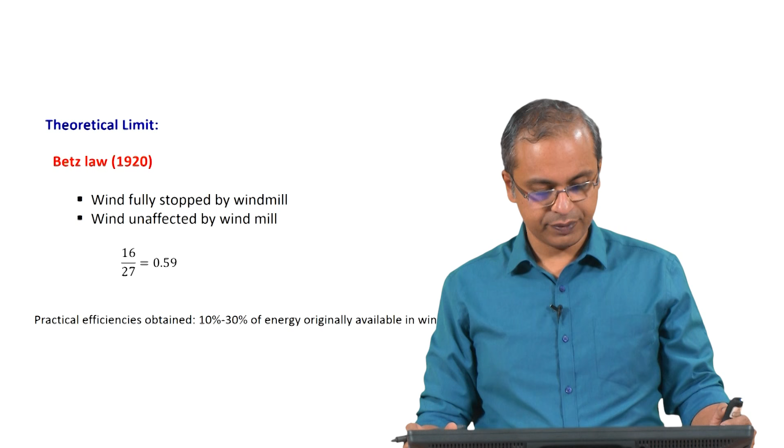We will go through this derivation, which brings together the way we derived how much energy is there in the wind. If you go through this derivation, you have a better sense of all the parameters people need to consider when looking at this kind of energy process. Okay, so this is what we will try to do. This, as I mentioned, is a theoretical limit on what you can extract from blowing breeze or blowing wind.

Of course, there are some limits to this limit, because like with anything else there are some assumptions on which it is derived, and you can always think of some way to violate or work around those assumptions, so this limit may not be the absolute upper end. But it is still considered a very important law, because a very large fraction of the windmills out there are designed such that they inherently fall within the ambit of this law.

So they do not have any new design features which are in violation of this law, so to speak, but largely they are consistent with this law. So we also mentioned that you can consider two extremes. You have a windmill and you have wind blowing towards the windmill. So you have two extreme possibilities.

One is that the wind is completely stopped by the windmill, and therefore it would appear inherently that all the energy in the wind got transferred to the windmill, and therefore got captured as energy that you could use somewhere. So that seems like the best possible way in which you would want to do it, because 100% of the energy is captured.

But in a practical situation, that is not what happens, because when you say the wind is 100% stopped, it is not disappearing anywhere, it is stopped there. It has just basically come and stopped in front of the windmill. It has not gone past the windmill. So subsequent wind that is coming there is not in a position to reach the windmill, because the wind that came there first is parked there. All those molecules that arrived there are parked right there in front of the windmill, they have not gone anywhere.

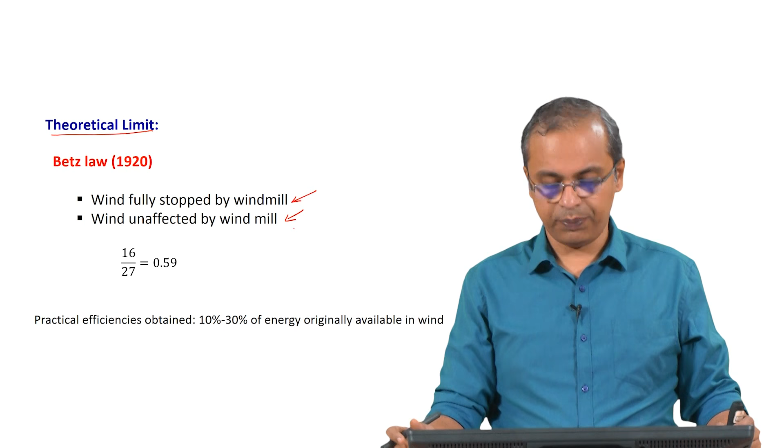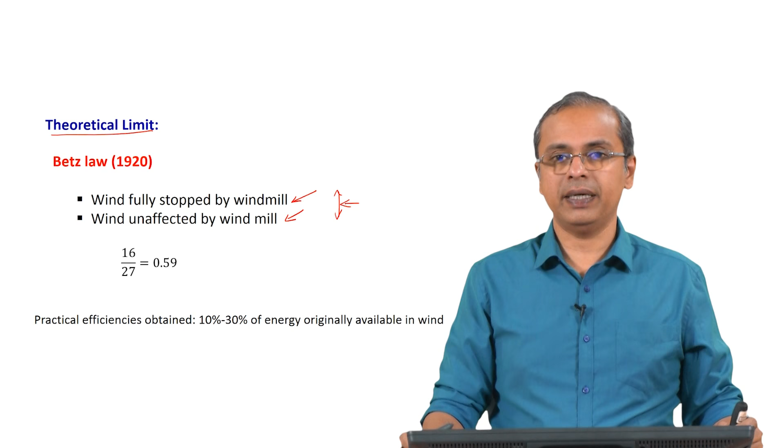So these two represent two extremes of how the wind might interact with the windmill, and in both cases the energy captured is 0. So naturally you can visualize that there will be a range of possibilities in between these two, where the amount of energy transferred from the wind to the windmill is steadily increasing and reaches some kind of a maximum and then goes back down to the other extreme. So these are the two extremes. Somewhere in between, not exactly in the middle, you can expect some maximum being attained during this transfer process. So we would like to get a sense of what that is.

It is also seen through this law that the limit seems to be roughly 59.3%. So that number we will see if we can arrive at: 0.593. That seems to be the limit that you can extract from the wind, which is not bad. If you are extracting 60% of the energy that is anyway coming to you free, that seems to be a pretty good thing to do.

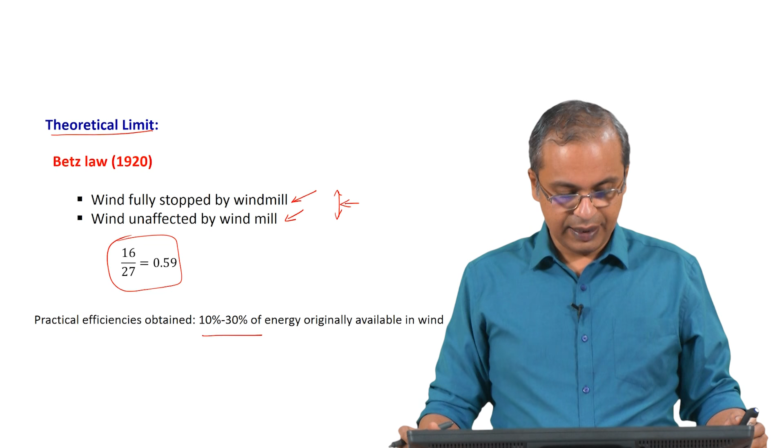Practical efficiencies are already in the 10 to 30% of the energy that is available in the wind. So if you take into account any other inefficiencies in the process, you are still getting about 30%, which again is excellent because you are doing nothing. The wind is anyway blowing, you just put a windmill and it keeps generating that as electricity for you. Right. So this is the framework of the Betz law, and this is what we will try to derive in our class today.

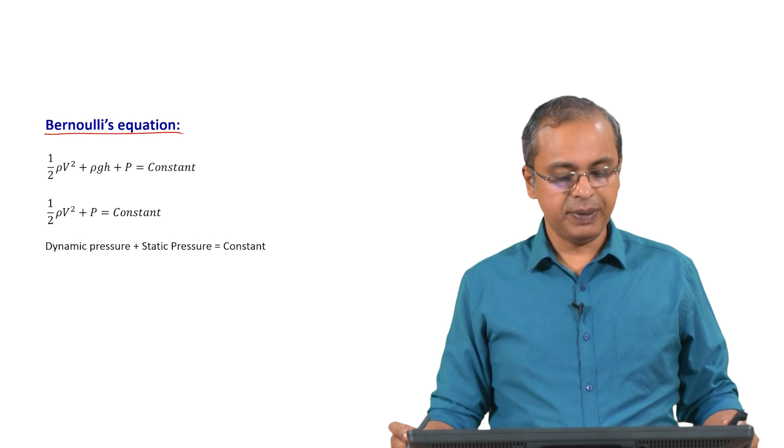So, to derive the Betz law, we need to start off with an equation which many of you may have heard of and may have differing levels of familiarity with. It is basically the Bernoulli's equation. So, based on your background, if you are in mechanical engineering, maybe you have spent more time reading about this equation.

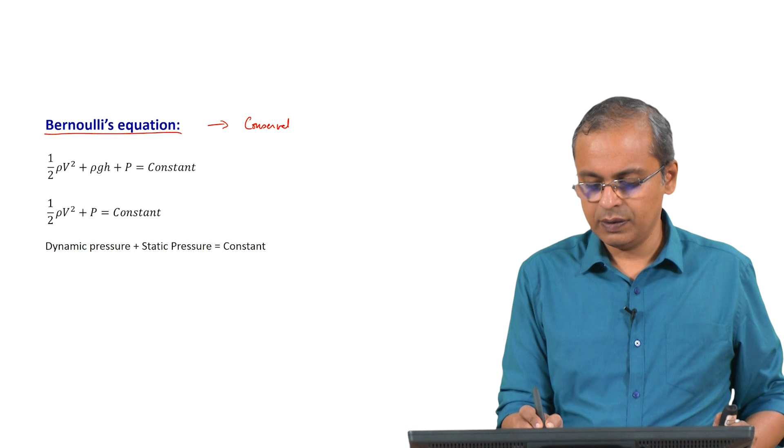Basically it is simply an equation that represents conservation of energy, but the scheme of parameters within which we are looking at this conservation of energy is in the flow of fluids. So, we always have kinetic energy, potential energies. We have various forms of energy.

We say energy is conserved, which means you start off with a system that has some total energy which consists of potential energy, kinetic energy, any other form of energy that might be there in the system. With passage of time, one form of energy will get converted to another form based on the circumstances. Maybe potential energy goes up, maybe kinetic energy comes down. At the end of the day, the total energy will still remain the same. We have not lost energy anywhere.

That is if you take the system as complete, with all entities involved in that system. We are more familiar with it in the form of day to day objects. We would typically have encountered problems where, let us say, a ball is traveling with some velocity and then it reaches some height. Based on the initial velocity you can decide what height it has reached, because whatever kinetic energy was there gets converted to potential energy. Many such problems we are likely to have become familiar with.

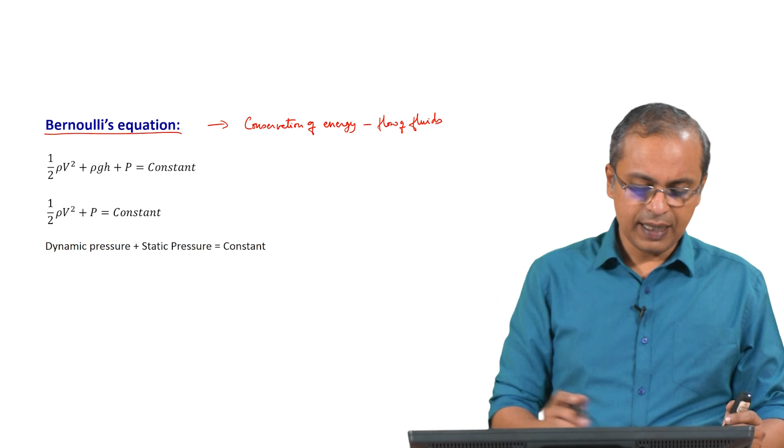The same concept is now used in the case of fluids. So, broadly there are three parameters to look at: something associated with the kinetic energy of the fluid, something associated with the potential energy of the fluid, and something associated with pressure of the fluid, and the sum of these three is a constant.

There are some assumptions here, so we will at least briefly consider those, but before we even do that, we have a quantity here, pressure, and on this side something that looks like energy. We say half mv square and we associate this with kinetic energy, and you have something like half rho v square here. Here you have pressure. So, how come we have pressure and kinetic energy in the same equation? It looks like there is something wrong with the equation, but actually it is not.

If you actually look at what is here, you do not have m, you have rho. So, we do not have half mv square in the equation, we have half rho v square. So, now let us look at the dimensions of half rho v square. Interestingly, you will find a value which will show you why it can be on the same side as pressure.

So, what is rho? Rho is simply mass per unit volume. So, it is the same as half mv square divided by volume. Density is mass per unit volume, that is all I have put here. Half mv square is kinetic energy, so that is in joules, and volume is in meter cube.

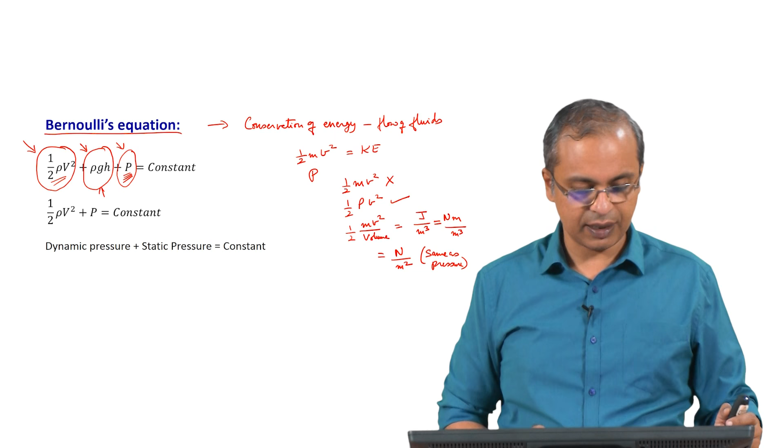So, this factor does not change from time to time. What we write on the left hand side will be the same thing that we will write on the right hand side. So, we can neglect it, we will just cancel it out and it is irrelevant to us. Rho g h by itself will be a constant in our case because h will remain a constant. So, the second term is irrelevant. So, really the equation that we are working with is this one, half rho v square plus P is a constant.

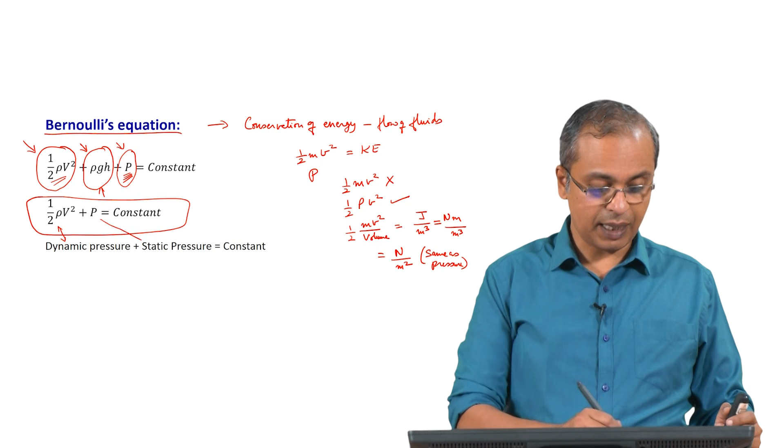And in fact, the way they describe it in the context of fluid flow is that the first term there is the dynamic pressure and the second term here is referred to as the static pressure. So, pressure in the context that we typically associate pressure with is the P that you see here, but we are also saying that when the fluid is flowing, you can think of another pressure, the dynamic pressure, which builds because of the fact that the fluid is flowing. So, this is a constant. So, when the velocity of the fluid picks up, since the sum is a constant, the static pressure is coming down and the dynamic pressure is going up, is the way in which we interpret this equation.

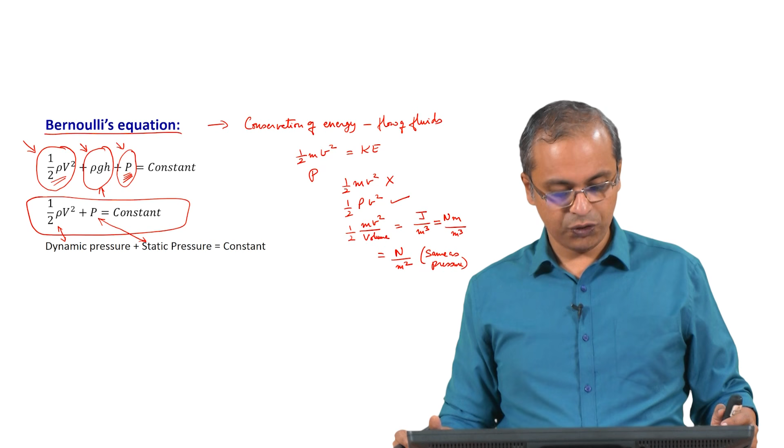Okay. So, this is what we will keep in mind as we go forward and try to derive the Betz equation. So, as I said, the way we will do it is we will consider that there is some windmill standing here. So, I will just draw it; we will assume that this represents a windmill that is facing the breeze, and then there is some region.

So, there is wind that is blowing this way and it goes past the windmill, interacts with the windmill and then goes away. So, coming in, the wind is coming in with a velocity v1, and we will say that this is far enough away from the windmill that the static pressure there is unaffected by the presence of the windmill. So, we will call that P infinity, far away from the windmill.

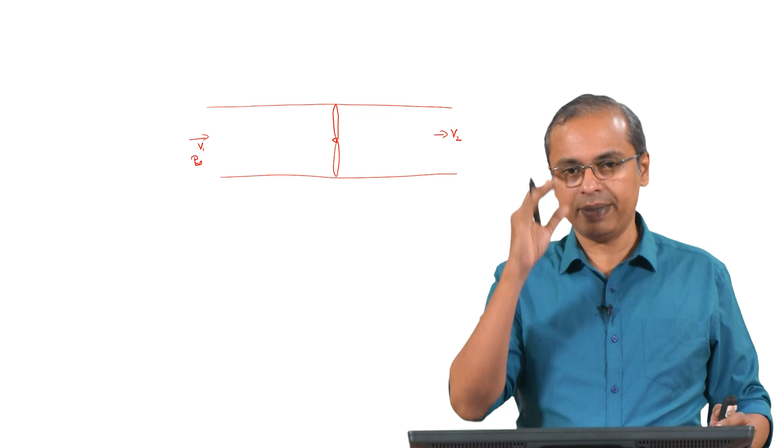And then when we come out on this side, again let us go far away from the windmill. Let us say now the velocity has stabilized at a value v2. So, it is past the windmill, some interaction happened, and after that something else might have happened to the wind; it eventually stabilized at a value v2, and again it is far enough away from the windmill that the pressure is back at P infinity. So, this is what we are assuming has happened to the breeze as it has come from one side of the windmill to the other.

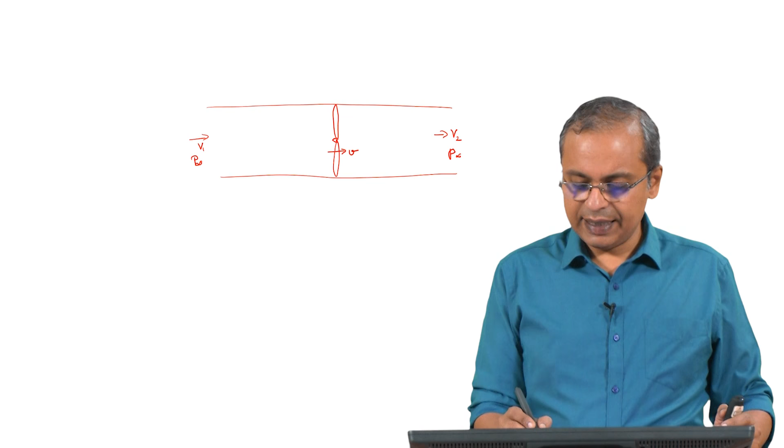So, as it crosses the windmill, let us say at that instant it has a velocity small v. And we will say that there is a pressure before, just before it interacts with the windmill, and there is a pressure after, just after it interacts with the windmill.

So, if you actually look at the derivation of the Betz law in various sources where they have discussed this in some detail, many of them take different approaches, with differing levels of detail. We will try to put this together in some reasonable detail which captures many of the salient features. You will see some variations based on the source in which you learn about this, but generally the flow of the derivation will be similar. So, you can decide for yourself the level of comfort you have with specific steps. So, right now this is the way we have set it up.

For example, there are various books which will simply tell you that this small v, which is somewhere in the middle between v1 and v2, can be assumed to be the average of v1 and v2. So, they will just say that we have an inlet velocity far away from the windmill which is v1, and an outlet velocity again far away from the windmill which is v2. So, we will assume that the v right at the windmill's location is the average of v1 and v2. This is the way some books will describe it.

We will do a little bit of derivation starting from the Bernoulli's equation that will actually get us this as a result. So, we need not blindly assume this result, we can arrive at it. As we said, the Bernoulli's equation simply has half rho v square, where v is the velocity, plus p is a constant. So, we will consider this as two halves: for this stretch we will write the equation and for this stretch also we will write the equation, and then if you compare those two equations, we will arrive at this result.

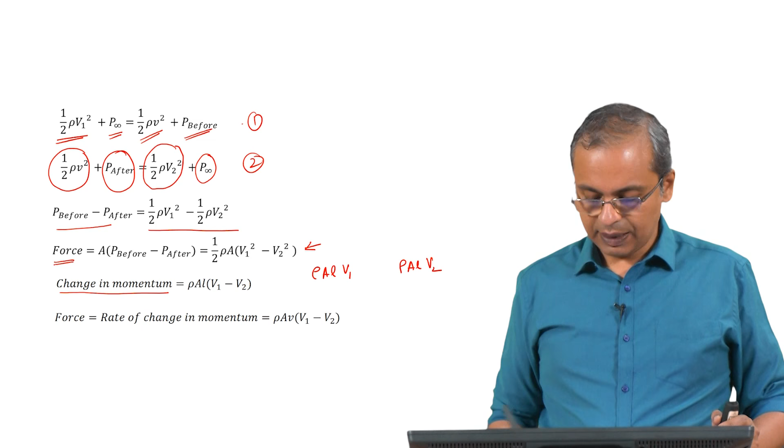And we also said we can look at the force as a rate of change in momentum. So, we start by change in momentum. The momentum before came as rho A l v1 and the momentum afterwards is rho A l v2. You subtract them, that is this term here, rho A l (v1 minus v2), and therefore the rate of change in momentum is simply rho A v, where small v is dl by dt.

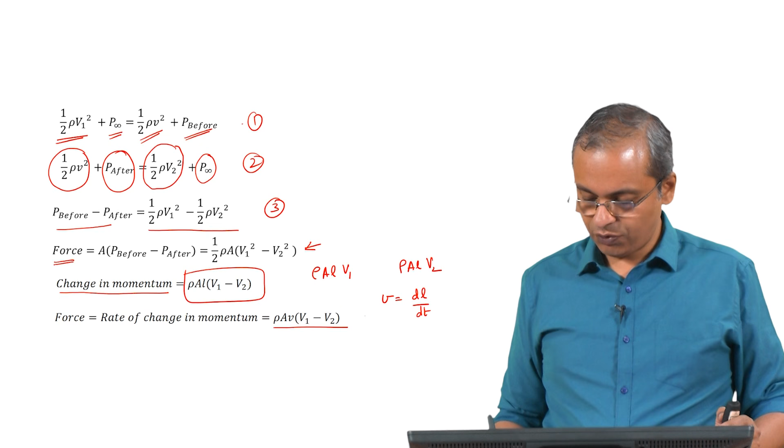So if you differentiate this change in momentum with respect to time, you arrive at rho A v (v1 minus v2). We will treat this as 3 and this as 4. So, 3 is equal to 4, and that is what we are doing here, or rather in this case 4 is equal to 3. Equation 4 is equal to equation 3 and therefore, we arrive at this equation.

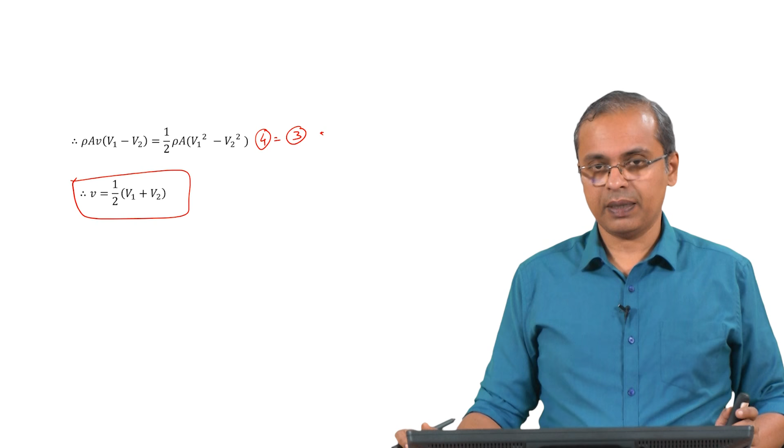Okay. So, this is the way in which we arrive at this fact that the velocity is basically the average of the two velocities far away before the windmill and far away after the windmill, right. So, now from this let us look at the power possibilities. So, again we go back to the kinetic energy. So, kinetic energy, change in kinetic energy, let us just look at kinetic energy.

The change in kinetic energy is half rho A l, so this is the mass, v1 square minus half rho A l v2 square. So, this is the change in kinetic energy. So, the power is simply d by dt of kinetic energy. Okay. So, power is simply rate of change of energy. Energy per unit time is power. So, this is the d by dt of this.

So, if you do that, this is simply d by dt of half rho A l, v1 square minus v2 square. Okay. So, this is what we will get. To complete this process, rho and A are all constants. So, only dl by dt is that velocity associated with that wind as it crosses the windmill. So, that is v, and v1 square minus v2 square. So, this is power.

Now, if you only consider the breeze far away from the windmill, that is what is heading towards the windmill, then the kinetic energy of the wind far away from the windmill as it is approaching the windmill is simply half rho A l v1 square, that is the first term that we had up here. We already saw this and I am simply deriving it here again for you.

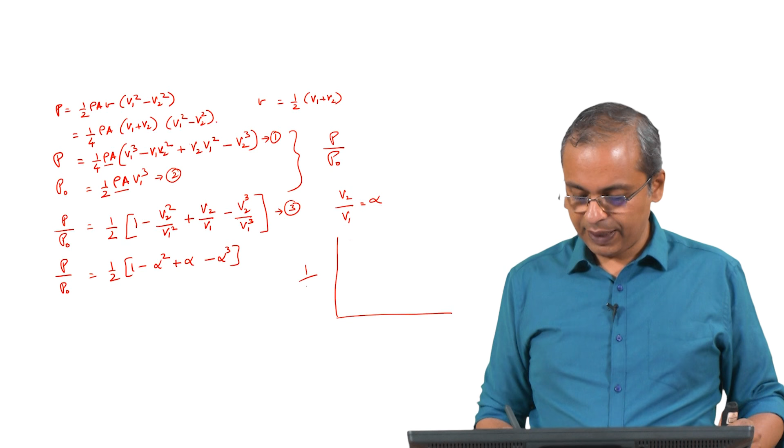So, you simply have to make a plot, and that is what I am going to show you shortly, of P by P naught versus V2 by V1, which is nothing but alpha. So, if you do the plot you will see something. As I said, V2 can be 0 or it can be equal to V1, so this is 1. If you plot it you will see some curve.

And so there will be some value which is the maximum. That is the ratio of V2 and V1 at which we can extract the maximum power from the windmill, and we will get some value here, the maximum fraction that we can get, and hopefully, given the way we are deriving this, that will be our Betz limit, if we have gotten this right.

So, this is one way we can do it, we can just plot it and come up with it, or we can simply differentiate this equation, because that is exactly what it is, we want this maximum value. So, at that maximum value we will simply have dP by P naught by d alpha is equal to 0. So, if you solve that equation also you will get the maximum. So, we can just solve that equation.

So, dP by P naught by d alpha is simply half of minus 2 alpha plus 1 minus 3 alpha square. So, therefore, we simply have to set this to be 0 to get the maximum. So, the quadratic equation is minus 3 alpha square minus 2 alpha plus 1 is equal to 0.

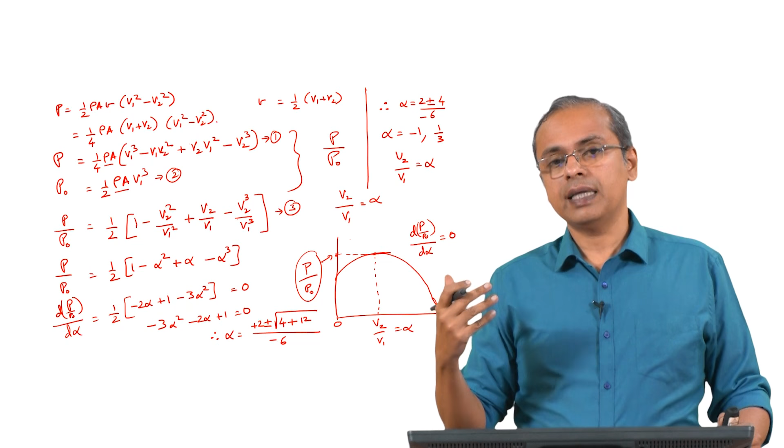So, now let us look at it. Alpha is, as I said, V2 by V1. So, alpha being minus 1 basically means that the wind came, hit the windmill and actually reversed back with the same velocity with which it came. Okay. So, that seems very interesting, but actually that is not possible because the wind will hit itself, right. It will turn back and there is still wind coming.

So, this is not something that can be sustained because you are not really distributing it anywhere. The wind comes and it is trying to head back the same direction in which it came. We are not allowing density to change, nothing is going to change. So, it cannot really do this. So, even though the equation gives us a minus 1, it is actually not meaningful, it is not physically possible.

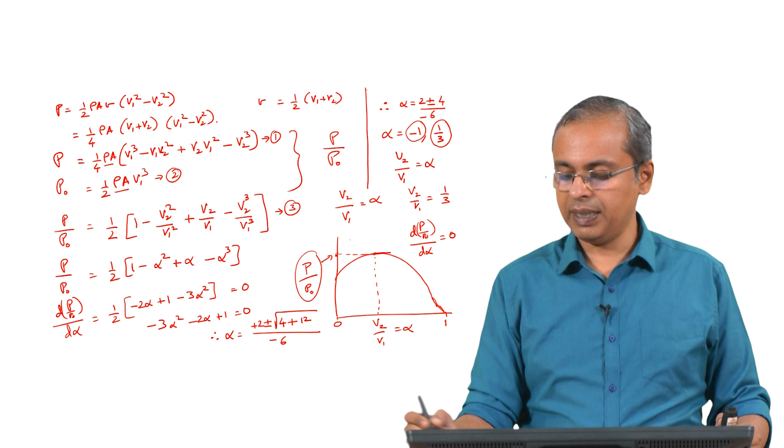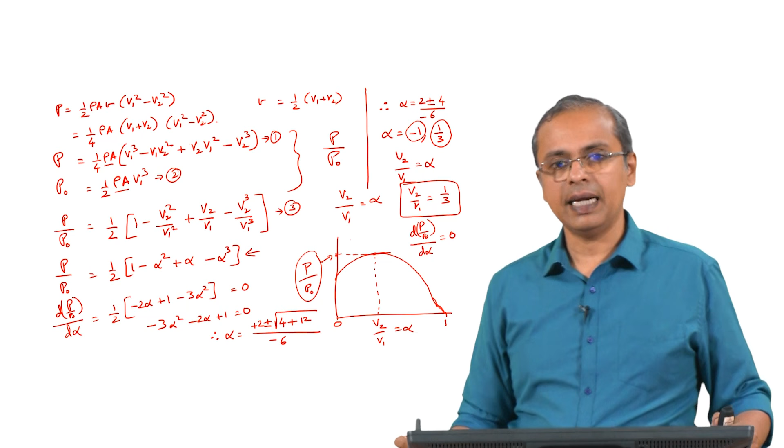So, alpha equal to 1 by 3 is the only one that seems possible. So, V2 by V1 equals 1 by 3 is the more meaningful result, and that is where we will get the maximum efficiency. So, we can actually substitute that back here, and you will get a value. We will just see that in a moment. The same equations I have put here, what I just wrote down on the screen.

So, the change in energy in the wind is rho A l V1 square minus V2 square. Power extracted from the wind is simply dE by dt, which is rho A small v, V1 square minus V2 square, and this small v is half of V1 plus V2, and that is what has been put here. And because of that half, this half here becomes 1 by 4 here.

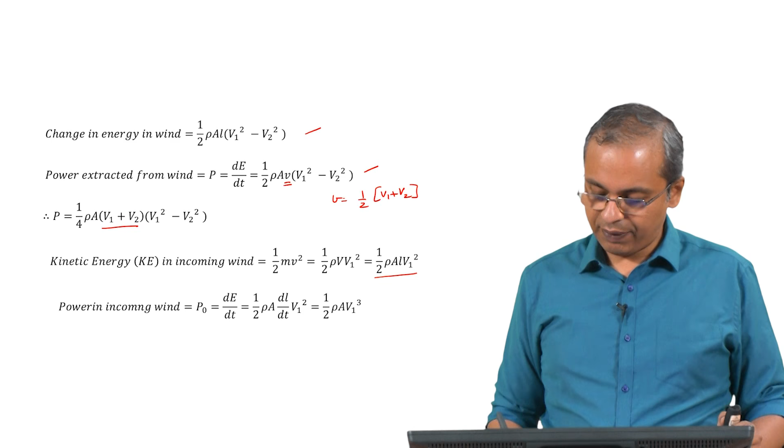Kinetic energy in the incoming wind is this, and therefore, power in the incoming wind is this value, which is what we did in our previous screen, and therefore, when you do P by P naught, this is the value that you will get, and that is how you arrived at this equation. And then we set V2 by V1 is alpha, and we arrived at P by P naught equals half of 1 minus alpha square plus alpha minus alpha cube, right.

So, this is the manner in which we got this, and if you actually look at this value of P by P naught, if you set alpha equal to 1 by 3, you will have 1 by 2 of 1 minus 1 by 9 plus 1 by 3 minus 1 by 27.

This is kind of what you will get, right. So, on this basis we can look at it. So, this is equal to 27 and then we will have 27 minus 3 plus 9 minus 1. So, you will have 27 minus 3 plus 9 minus 1.

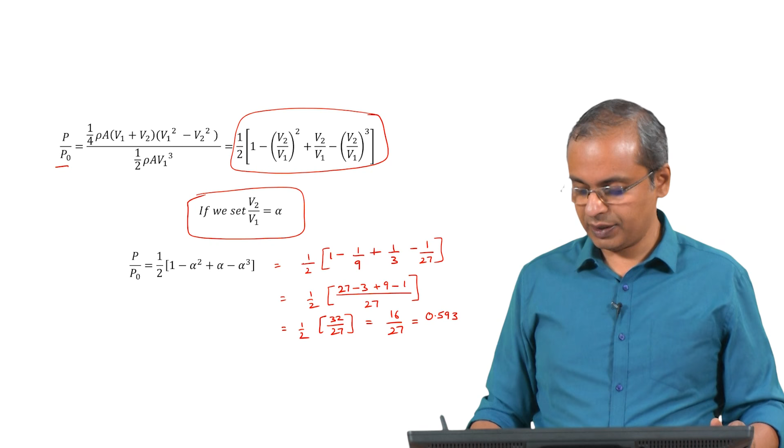So, this is the derivation for the Betz equation. We are able to get this 0.593, and that directly comes from starting from Bernoulli's equation, looking at the energy per unit volume, essentially incoming, what is outgoing, and equating them, and then arriving at this value 0.593. So, as I said, you can also do this as a plot. So, that is essentially what I have done here.

So, if you see here this value P by P naught, I have plotted as a function of V2 by V1. You can easily do this, you simply take any spreadsheet. I have just used Excel, you can use any other spreadsheet or plotting software that you have, and you make a plot of various values of V2 by V1. As I said, for us it is meaningful to look at values between 0 and 1, which means V2 is either 0, the wind has been fully stopped, or V2 is the same as V1, in which case it is going undisturbed by the windmill.

So, if you plot P by P naught as a function of V2 by V1, you see this curve, and at this curve you see a maximum. This maximum, as you can see, is very close to 0.6, 0.593 is the value we got. If you go down, this is some 0.333. So, that is the value at which we get it.

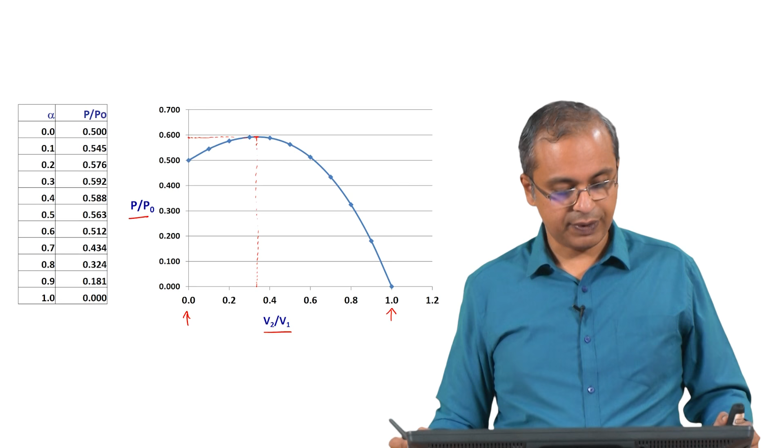You can see here I have just marked various values of alpha, and for that the various values of P by P naught. So, you can see here at 0.3 we have reached a value of 0.592, and it is only marginally more than that. 0.593 is the maximum that we can get. So, that is how the Betz limit comes about, and it is a calculation done in the 1920s, and as I said, you can see various versions of this, and the calculation works out as we described.

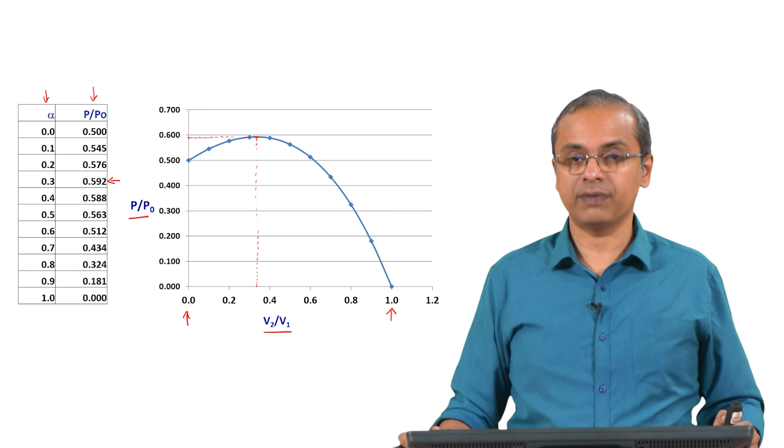So, in conclusion, the Betz limit indicates that only about 59% of the energy available in the wind can actually be captured. This has some assumptions. There are ways in which you can think of going around these assumptions, and there are some versions of the windmill which may not conform to this assumption. For example, we have assumed that the windmill is a plane, right. So, a single plane across which this velocity variation is happening.

Some of the vertical axis windmills actually occupy some horizontal extent as well, that is some places are closer to the wind that is incoming, and some are away from the incoming wind. So, that changes how the equation is set up, and so strictly if you directly apply this equation there, it is not really a valid way to do it. Some variations are there, and that can change the way in which we look at the efficiency. In general, the actual efficiencies will be less than this limit, because this only sets the upper limit for a certain type of windmill.

So, in summary, in this class we have tried to understand how the derivation for the efficiency of the windmill comes about, and the idea that there is this limit which is 0.593 or roughly 59%. That is the maximum power that we can extract from the wind that is incoming towards a windmill. So, I think that concludes our class. It gives us a good background to understand what is possible with the windmill, and what are some limits of this whole process. Thank you.